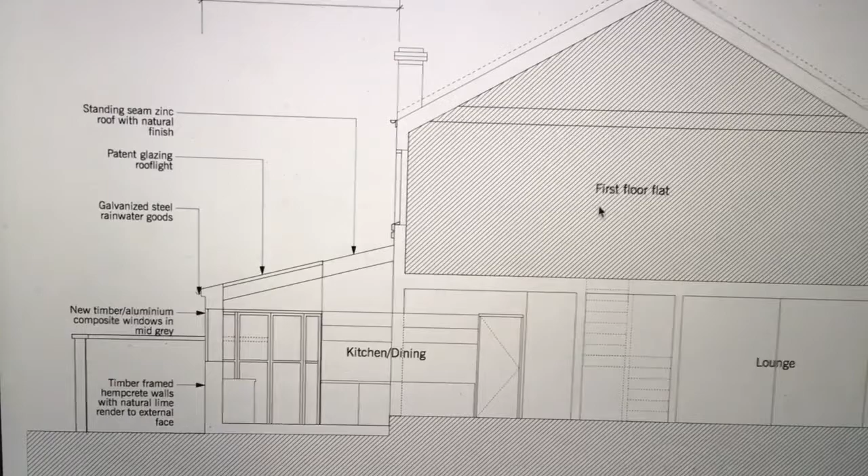Planning permission. For the planning application, you need to produce plans and elevations of the existing structure and the one that's being proposed. I had some help getting all of this stuff together. The design work is all done in SketchUp, but a friend did put the plans and elevations into an architectural design package to make them look a little bit more professional.

And then there's a thing called a design and access statement, which seems to just be a way of showing them that you give a damn and that you might spend a bit more on your project maybe. At the end of the day, planning departments are interested in whether you're improving the housing stock. So you don't have to submit it, but it can help.

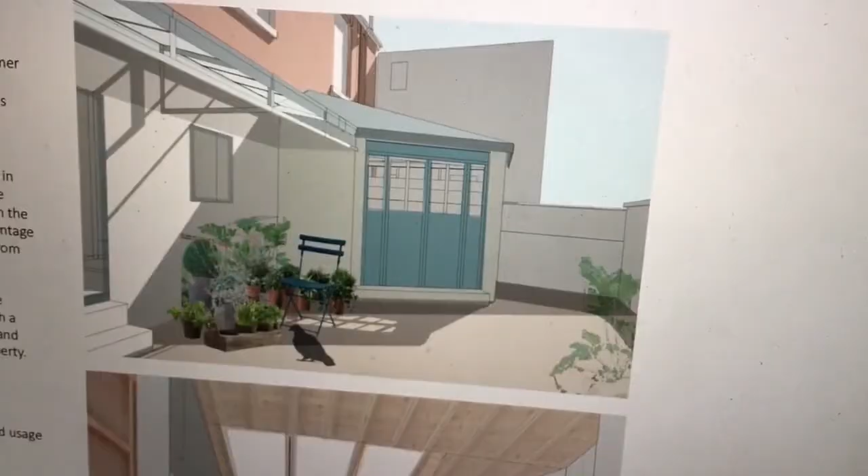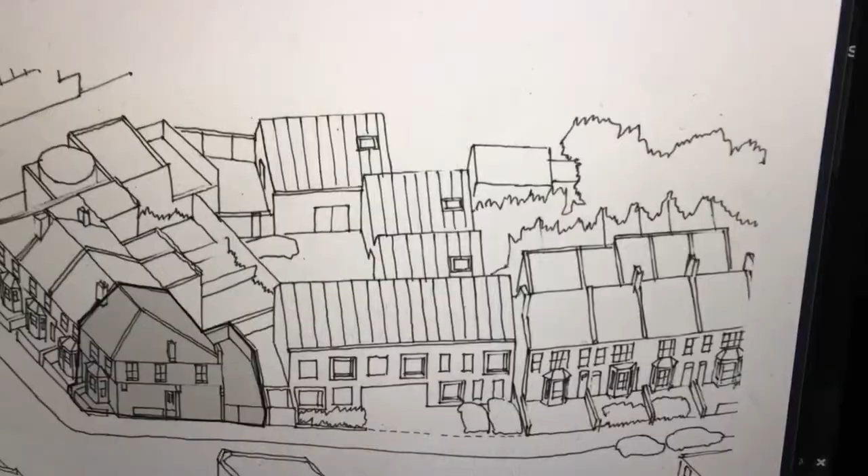The design and access statement is full of pretty aspirational pictures of elegantly crafted architectural spaces that also have these huge, terrifying pigeons and strange, ghostly figures carrying shopping. It gives context about the location and the existing structures, and also design elements from the local area, warehouses, shop fronts, and double mews doors.

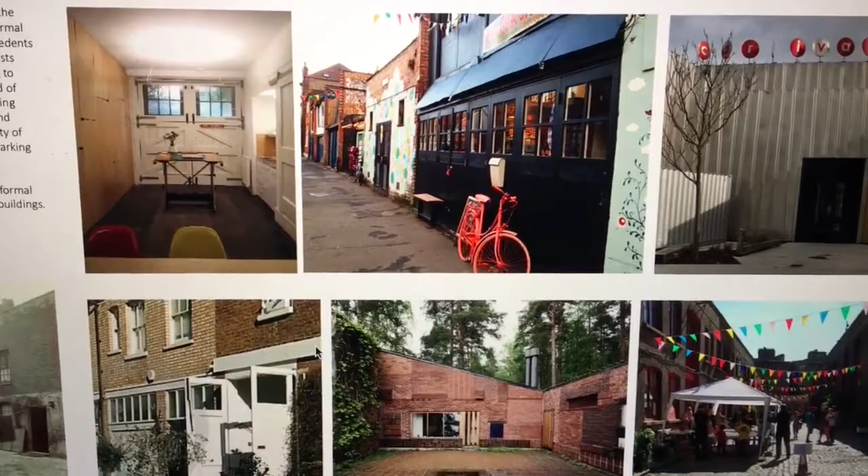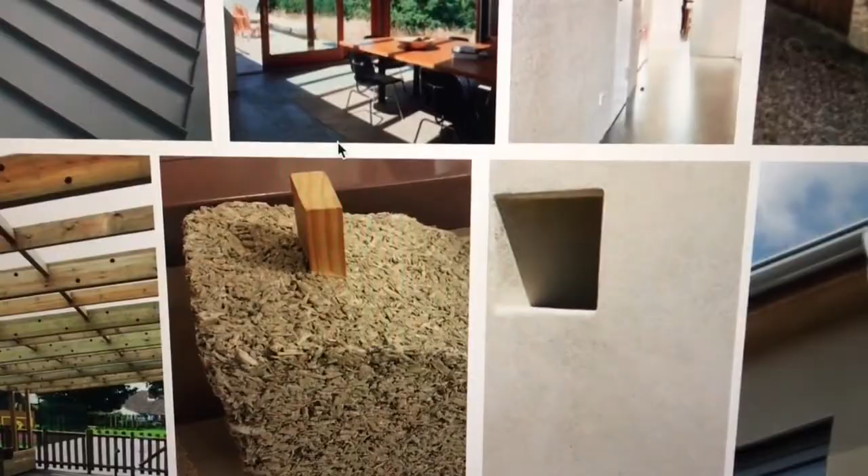This bit's a bit like the sketchbook you keep in art school to show your progress. Look, we drew this roof, but it was crap, so we did another one. There's also some information about the materials - the Hempcrete, and of course, the all-important access, parking and bins.

Is he still talking? Shh!

There were problems at the planning stage. We had an objection, for instance, but we resolved that by lowering the roof a little, which is a rationale for building some leeway into the design. But none of the problems have anything to do with the building being made of hempcrete.

You'll remember that the design in any case looks indistinguishable from a building made of brick and glass. So as far as planning are concerned, all you're dealing with are the same problems you'd be dealing with if it were made of bricks. Once planning permission has been granted and you move on to building control, however, there's a little bit more to think about.

If you're doing something unusual, some people advise that you hire your own building controller who knows the ins and outs to make the process more straightforward, but this is a very small structure, so it didn't seem worth going down that route. That leaves the two normal options: tell building control that you're starting and then call them every time they want to inspect, or submit building control plans so you can have the whole thing pre-approved. That costs a bit of money, but the advice I received was to do that anyway because it's an unusual structure, so there aren't any surprises along the way.

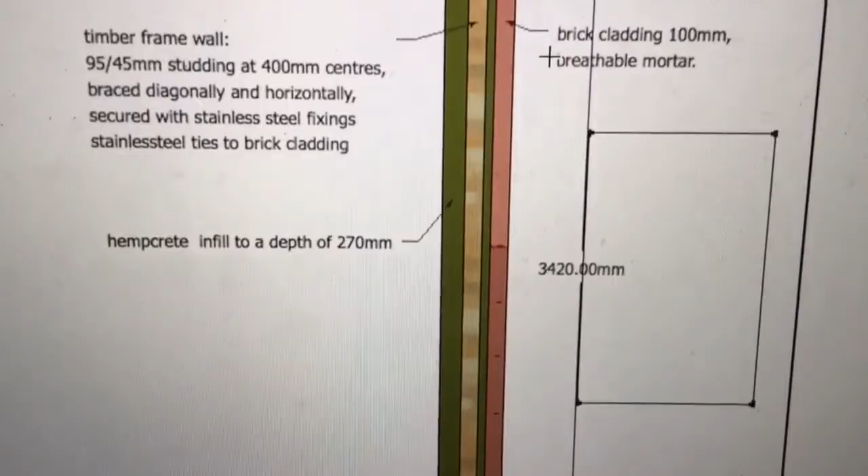You can see from these folders it took me 7 attempts to get that right. Submitting building control plans is a big job in its own right. You have to put together much more detailed plans and sections showing the exact construction method, and go through multiple amendments until you get it right.

The way SketchUp handles groups means that taking sections is a pain, so I just ended up drawing them again in a single plane in SketchUp. Here's the roof build-up, the footing detail, and the party wall.

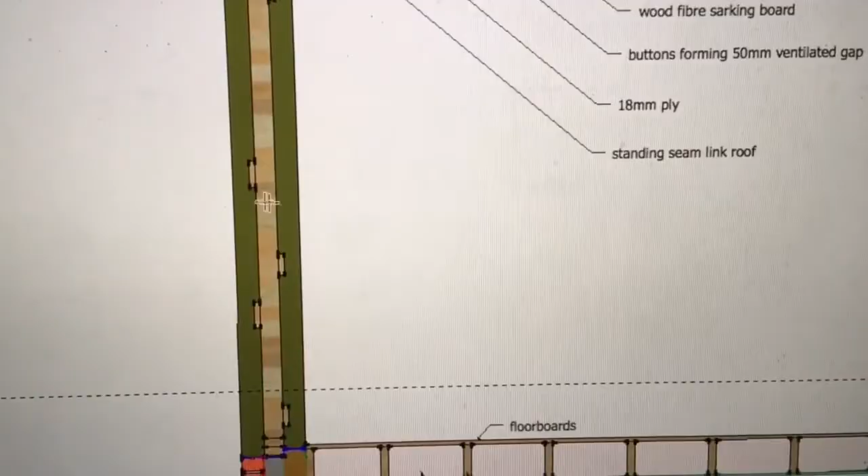Let me start by talking about the foundation. A timber and hempcrete wall doesn't really weigh very much in comparison to a brick and cement one, so theoretically there should be an opportunity to use a smaller foundation and reduce the carbon emissions of the build, but frustratingly that wasn't really possible. At several points in the process, I might have been able to force the point by paying a structural engineer to demonstrate what was really necessary. If it was a bigger building, that would definitely be worthwhile because there's quite a lot of extra carbon emitted by doing things the normal way.

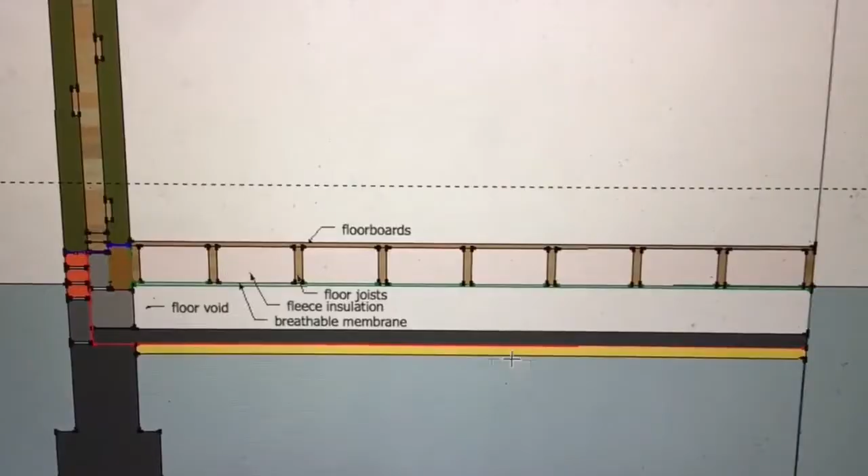But in this case, it's a tiny little structure and I was trying to keep costs down, so that wasn't really possible. You can build a hempcrete structure on a reinforced concrete raft foundation that spreads the load across the surface of the ground, or use a shallower strip foundation, or there are lots of other methods which have a lower carbon footprint than pouring a lot of concrete.

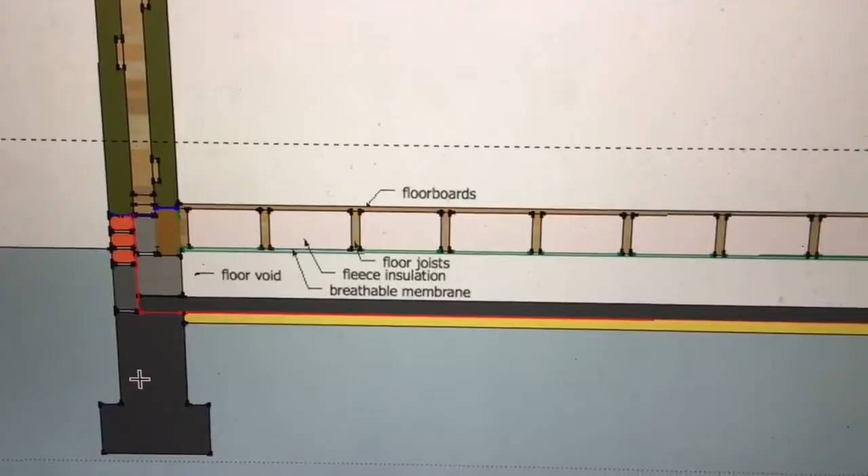But this is built on London clay, which is tricky and has a habit of moving around, and in any case, building control know what a strip foundation is, and that's what they want to go with, just as if it were the equivalent brick wall.

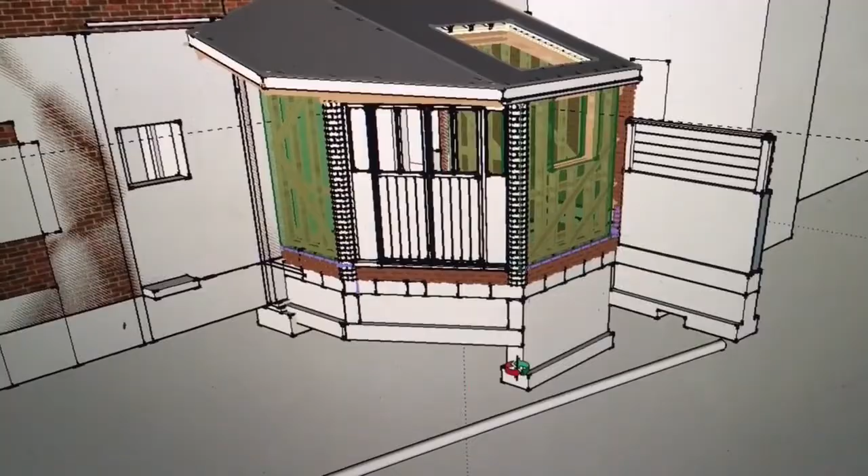So it's on a strip foundation, but then comes the problem of the drains. This is a public sewer running through the yard. Now the extension misses the sewer by just enough, but the regulations laid down by the Thames Water Authority say that you've got to better the depth of this sewer by 150 millimetres. This is so that you don't put load on the sewer if you have a heavy building.

As long as you go along with these regulations, you can just check a box on the Thames Water Authority website and you've got a build-over agreement. There's no mention of what you should do if you don't have a heavy building. It's probably not structurally necessary to make the foundation deeper than the sewer, but it would be difficult to show that.

Consequently, a foundation a metre deep becomes a foundation nearly 2 metres deep. So now I'm forced to pour a huge amount of concrete to support a wall which doesn't really weigh very much. Back at the beginning I asked if it was possible to build a carbon negative extension. I think with a ridiculous poured concrete foundation like that, the answer is probably no, sadly.

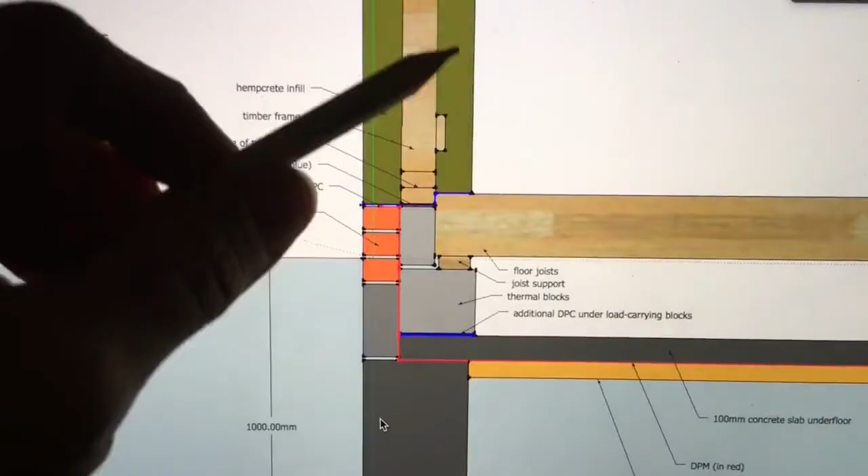But everything above ground will be reduced carbon, so overall there'll still be carbon savings on the structure. This detail shows the hempcrete wall in green and the plinth that supports it, and this is another area where building control took a little bit of convincing.

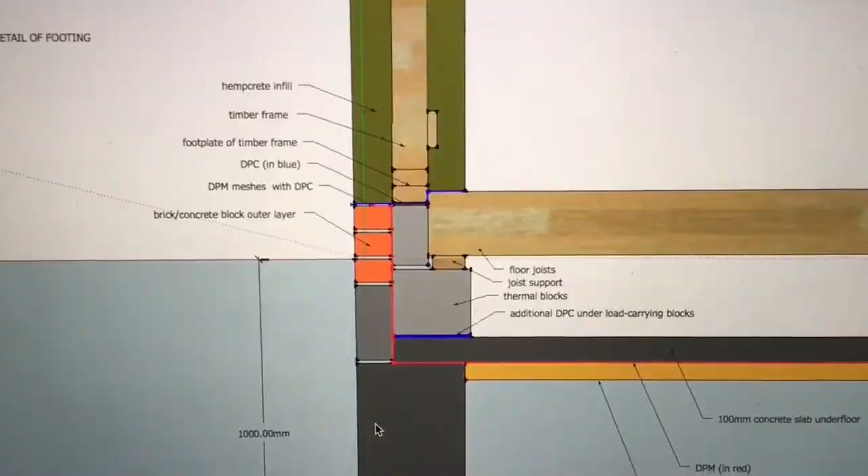The main difference from what they're used to is that they're not used to the wall build-up being breathable, and they're expecting a cavity wall structure to keep the plinth dry. Hempcrete is vapor permeable, but it will rot in the presence of standing water, so the plinth needs to be designed carefully.

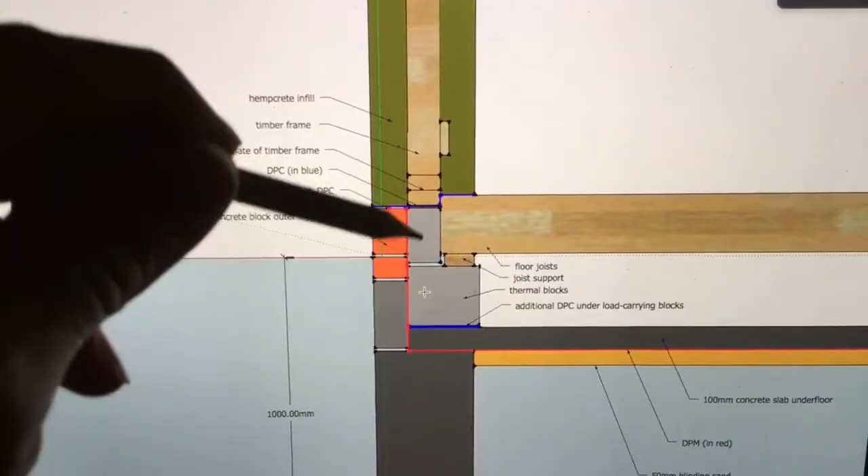Because the timber frame in this design is in the centre of the hempcrete wall, the load of the wall is also on the centre of the plinth, and this is where the cavity would usually be. That keeps the footing dry.

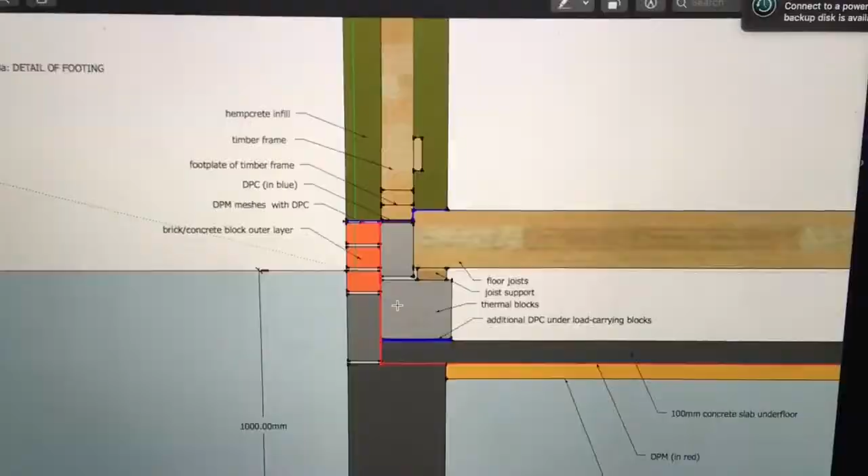To deal with that, waterproofing has been achieved using a membrane here, and then we put in these thermalite blocks, which take the load of the timber frame and also provide a little bit of insulation to keep the footing warm. Building control also expected a step in the damp-proof course here to protect the base of this timber, but I was able to argue that any moisture entering the wall here can evaporate out again because this entire wall build-up is breathable.

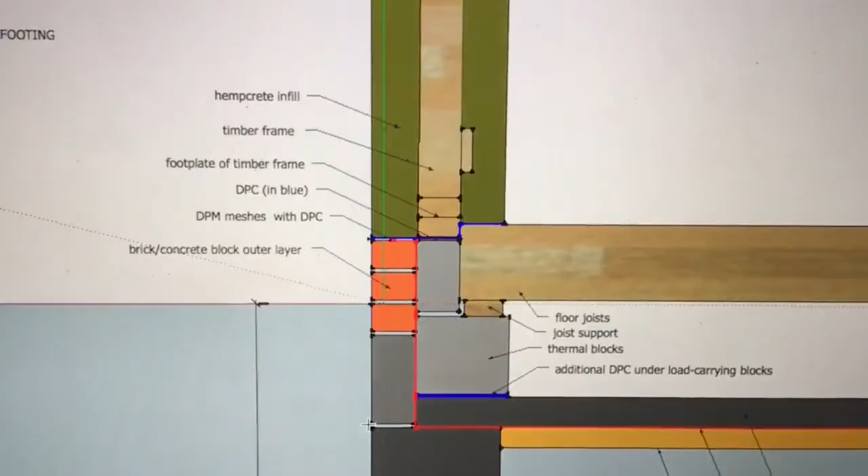The hempcrete experts actually suggest that this damp-proof course isn't necessary at all, because any moisture making it up that far can escape through the breathable hempcrete, but they say they've given up arguing with building control about that.

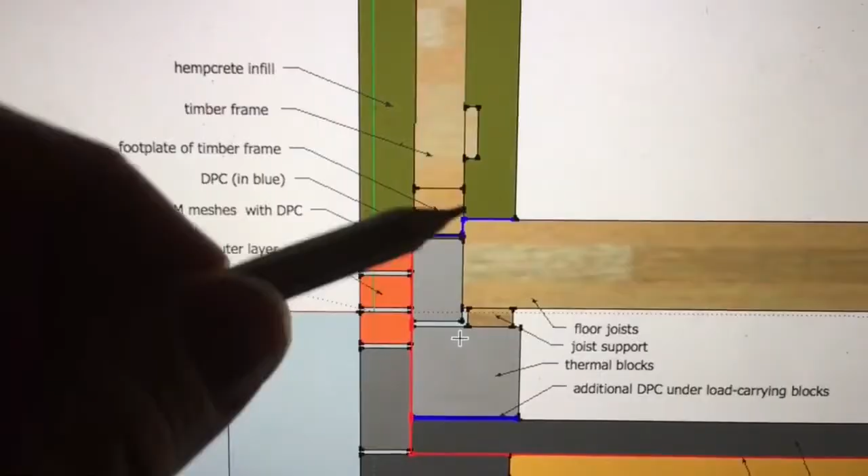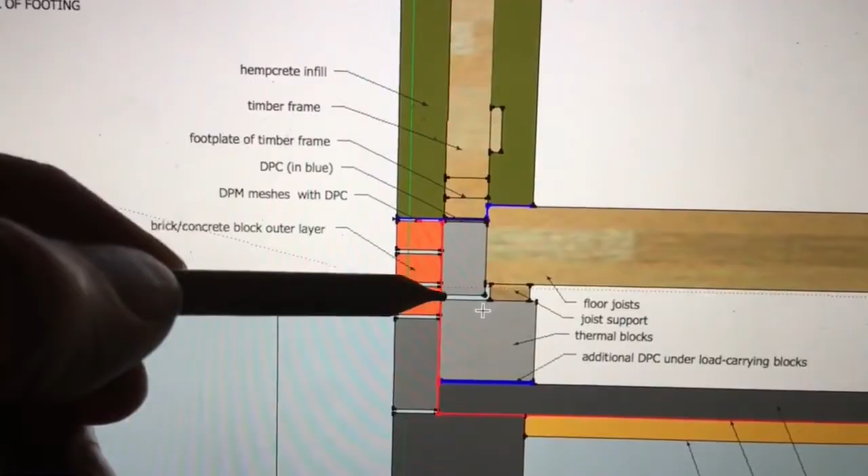The final issue was that this timber frame needs to be bolted or strapped to the structure below so that the building is tied into the ground, and the fixings break this damp-proof course. So if you believe the damp-proof course needs to be there, you either put stainless steel straps down this side and mend the point where they break the DPC using sealant, or you drill through the base plate of the timber frame into the thermalite, put a resin anchor in there, and the resin reseals the damp-proof course as you push the bolt in.

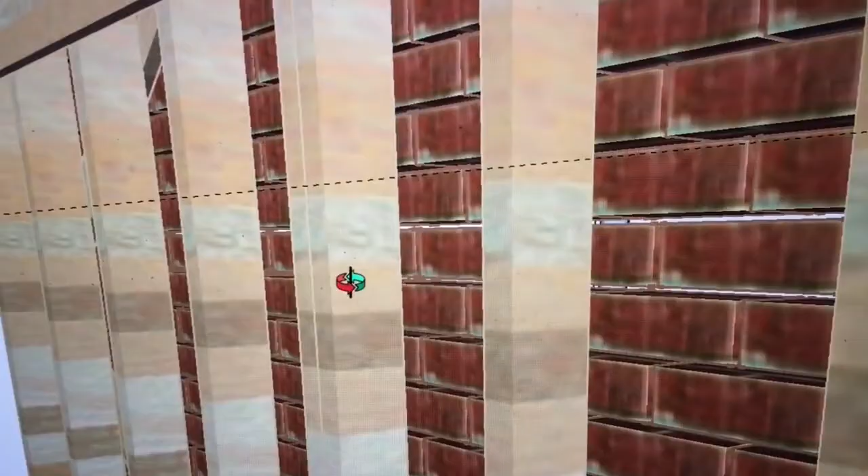A final example of how it can be difficult to communicate why building in hempcrete is different is this brick cladding on the side of the building. The bricks are tied to the timber frame using stainless steel ties, and the timber frame is reinforced by the hempcrete itself. Whilst it isn't self-supporting, hempcrete does increase the racking strength of the timber frame it's placed around, making the whole wall much stronger.

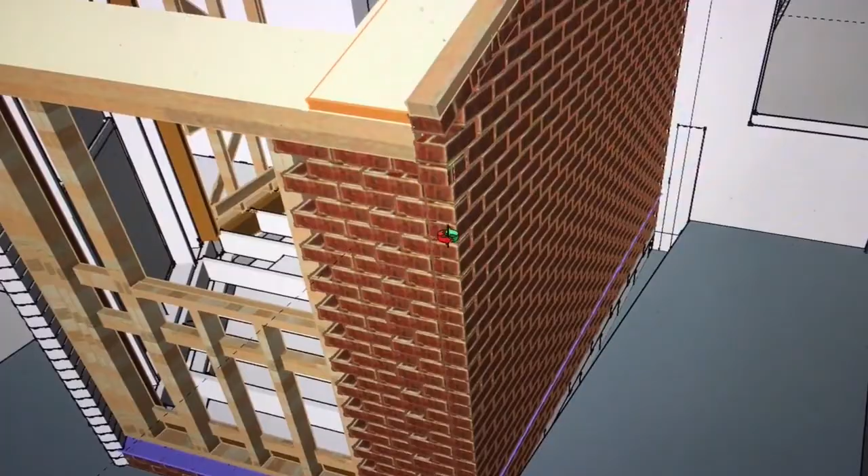This means the brick cladding would be well supported by the hempcrete wall itself, and this brick return here isn't actually necessary. But as far as building control are concerned, this is standard practice for supporting a single skin brick wall. Adding that brick return caused quite a lot of extra complications, but proving it's not necessary is probably quite a complex calculation, so in this instance I had to let it go and get on with building it.

That about concludes my building control chat. I hope that it's had you on the edge of your seat.

It might be worth mentioning a little bit about party wall agreements. Party! I can honestly say they are the most fun you can have on your own.

There are 2 neighbours affected by this structure, and each of them needs a party wall agreement. One allows me to put the flashing of the roof into the wall of the upstairs flat, and the other allows me to rebuild the party wall.

The actual detail of it is much the same kind of thing as submitting plans to building control. You've got to submit sections and elevations and all of that kind of jazz. The process requires one party wall surveyor.

And that party wall surveyor enacts the statute, which all party wall surveyors have got to enact, to make an agreement between the two neighbours.

But if they're feeling nervous, the neighbours can appoint their own party wall surveyor. And because I'm the one making the structure, I've got to pay for their party wall surveyor as well.